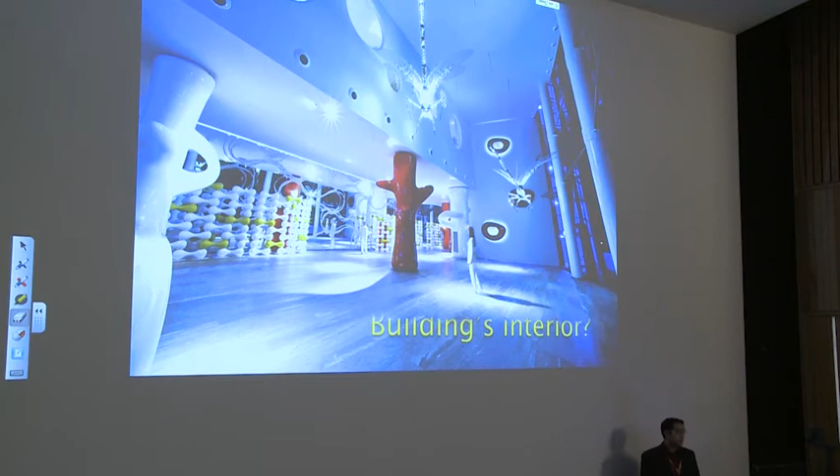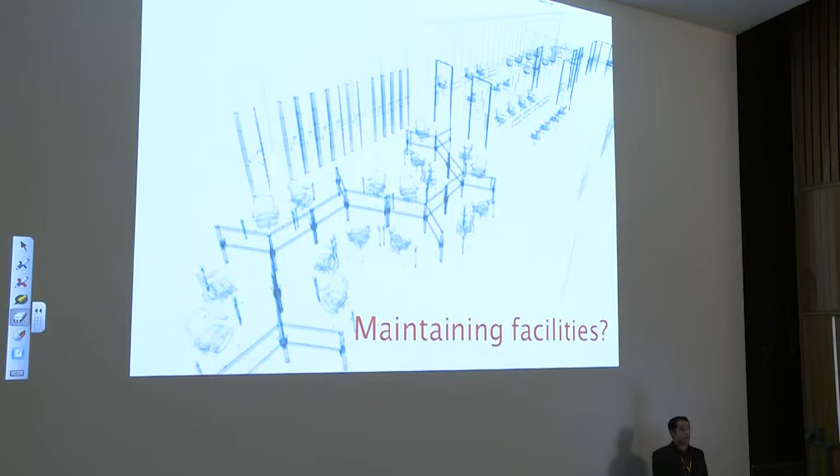Is it the building's life? Is it the building's interior? Is it the energy performance of the building, which most companies look at for the moment? Is it maintaining the facilities within the building? Or is it about occupant satisfaction in the building? To be honest with you, it's all about this.

That's why it's a concept. It's an interdisciplinary concept, and you can't really identify it.

Unfortunately, if you see the left figure on top here, it shows there is a potential for the building. This is one example of a building where the energy performance, meaning the energy consumption of that building, is potentially meant to be at grade C, which is very high, so it consumes less energy. However, once the building starts operating, it's at almost grade F.

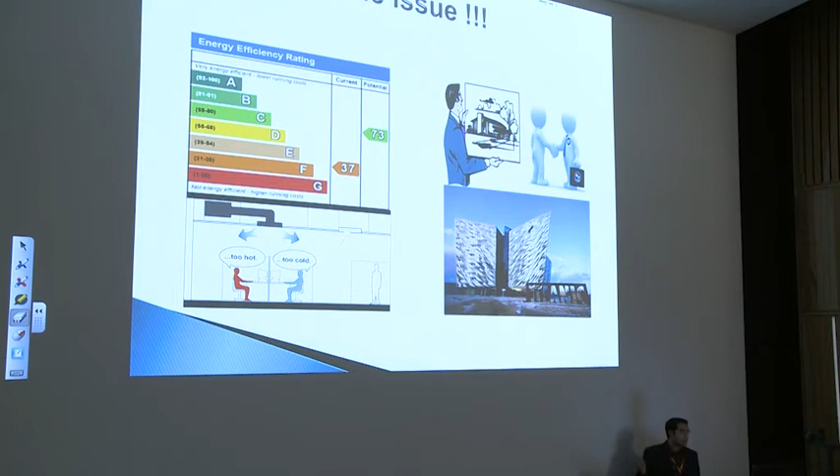Very surprising. Why? And of course us, the victims, you see people complaining about the temperature. It's too cold and too hot, even within the same area. On the other side here, one side of the problem is buildings not performing as intended, unfortunately.

The other side of the problem is performance is evaluated from a single perspective. Unfortunately, this is a very sad truth that the building management team always takes charge of the delivery of the building. The client wants the building delivered with the minimum cost, the designer wants to deliver it with higher efficiency, and the rest of the parties who play a main role in the delivery of the building, their main objective is just to deliver the building with minimum cost.

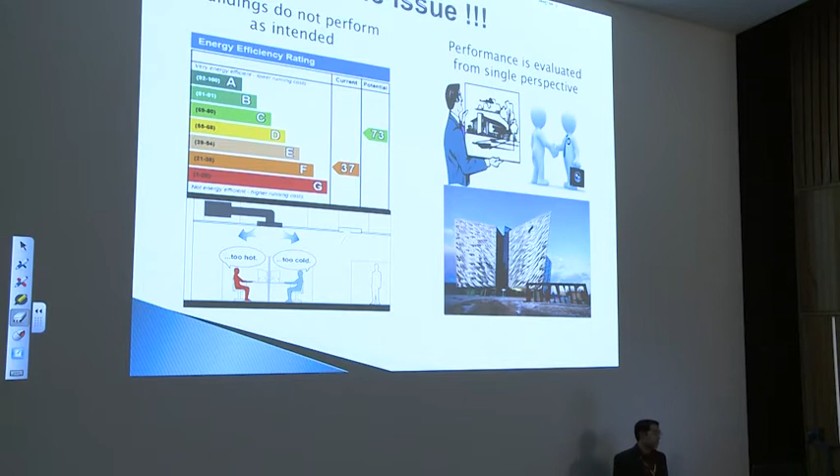So if we summarize here, buildings are more than delivering the building itself. If you see the bigger circle, it describes what the real life is, what the actual truth is. There is always a desire to deliver the building through design and construction, then operation, and then it goes with less importance to caring about the planet, environment, sustainability, then less into people, and then less the prosperity. From that point of view, I think my research focus would be on consideration of the multiple perspective.

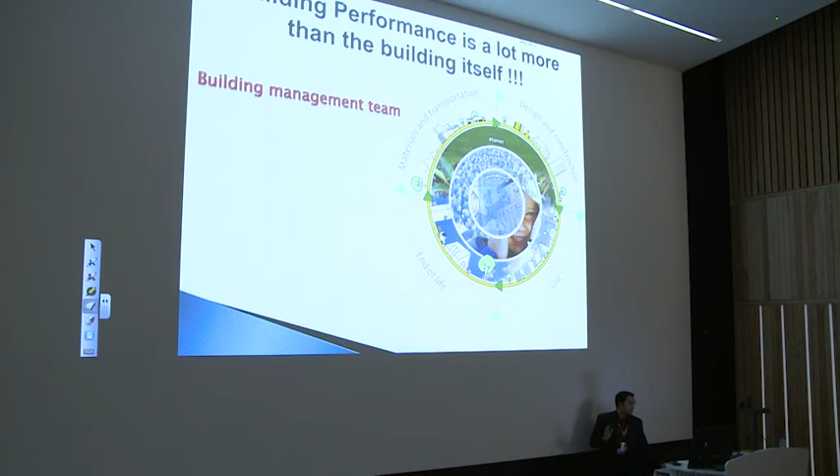If we take it from the most important to the least important: the building management team are the ones making decisions and delivering the building. Facility management are the hidden angels of the building, trying to maintain the balance between the building management team and the building occupants. The building occupants are the victims, the ones who don't have any contribution, and who either end up satisfied or totally unsatisfied within the building.

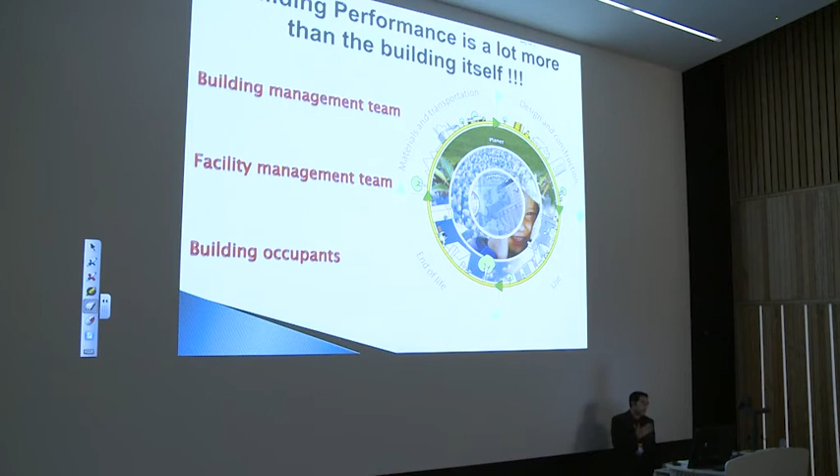So there should be a solution that can at least provide a platform which could collect all these inputs from the three different perspectives. It's building information modeling.

Building information modeling, in simple terms, is like a mutual platform where all the stakeholders within the building have their inputs: civil engineers, mechanical engineers, electrical engineers, architects, designers, clients. They all share their information within a single platform in a 3D model environment, and each one of them can get updated with any change.

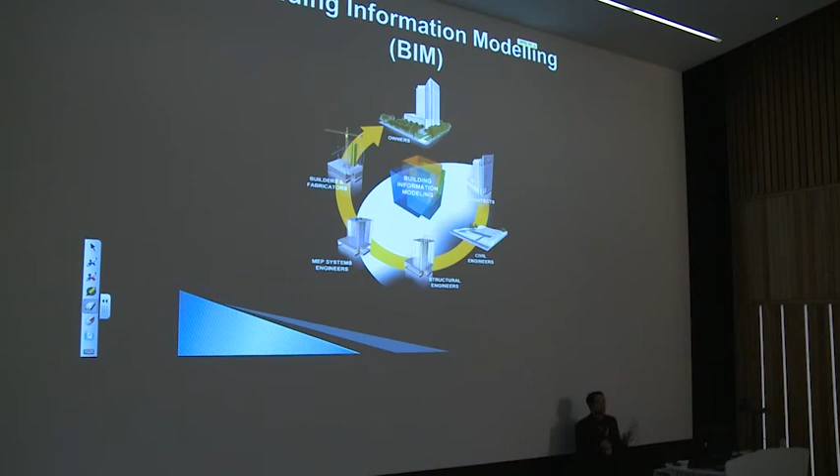With the use of this technology, we can see very high detailed 3D buildings here. But again, I'm not trying to promote the technology. At the same time, a lot of people understand BIM models as just very fancy 3D models.

In fact, it's not. BIM is a process. That's why it's called building information modeling, not 3D modeling, because 3D graphics have already been around for a long time. What building information modeling provides is the ability to have input inside the 3D model.

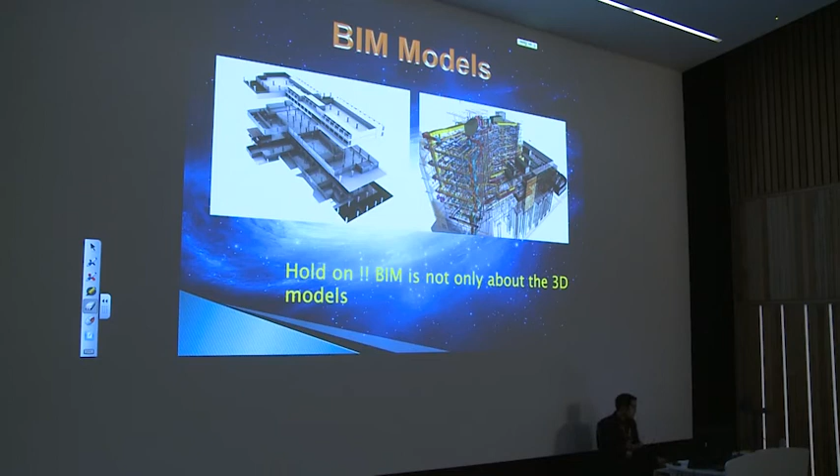So what does BIM provide? It provides coordination, allowing everyone participating within the project to coordinate and collaborate at the same time.

It detects the clashes between systems integrated within the buildings. It provides full system integration. You can't imagine the number of systems within a building, and when they're all integrated into one single model, how enormous that is, how big it is, and how difficult it was.

Some companies like Autodesk Revit are now providing a single interface for all these systems. Can you imagine? And it allows pre-building navigation. Navigations within the building are normally developed after the buildings are built, but BIM actually provides you the chance to do that at the design stage.

It provides life cycle information, going not only from design to construction, but from design, to construction, to operation, to the whole life cycle of the building. And it provides an effective facility management tool, which I will explain later.

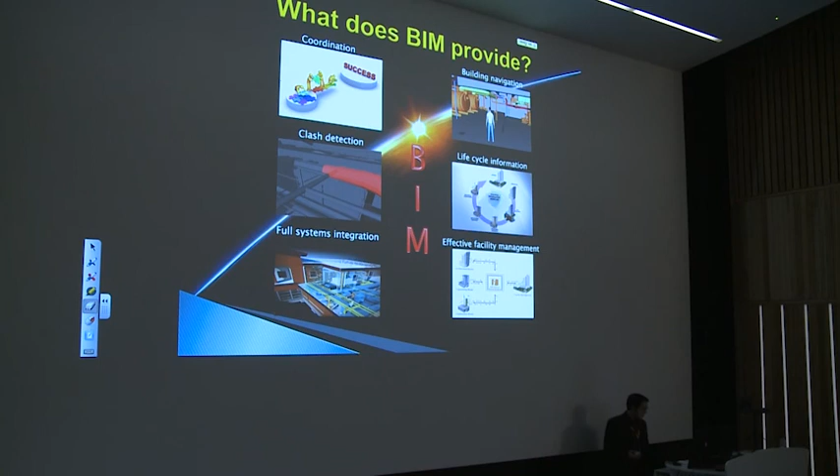It delivers sustainability. This building, the one you are in now, recently won an award as the most sustainable building in the West Midlands, and it was actually designed using BIM. All the systems within the building were simulated through BIM, and you can see there's an accurate energy performance.

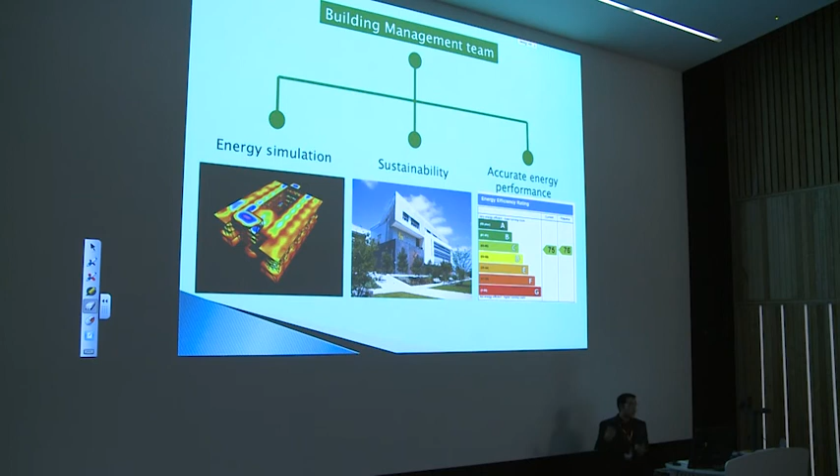It provides accurate energy performance. So even though there is a little difference, the gap is not huge.

For the facility management team, it helps them manage the operation and maintenance. So for reactive maintenance within the building, they can get information at the pre-design stage or design stage, where they know how systems are being repaired or replaced within the building. They can manage the space as well.

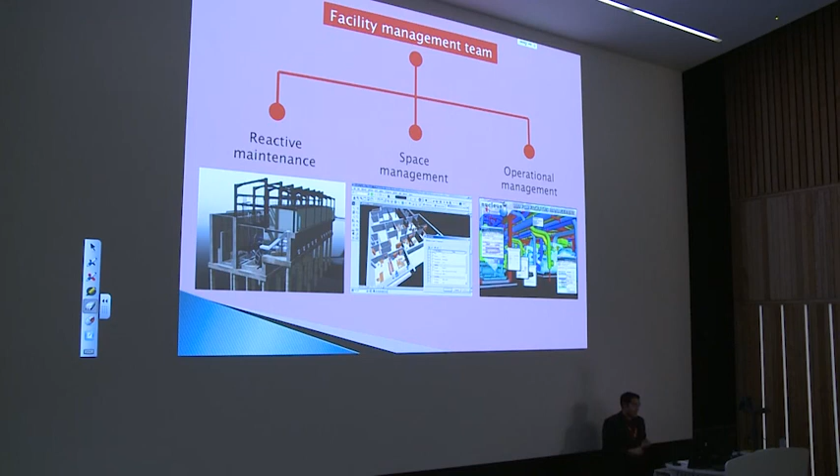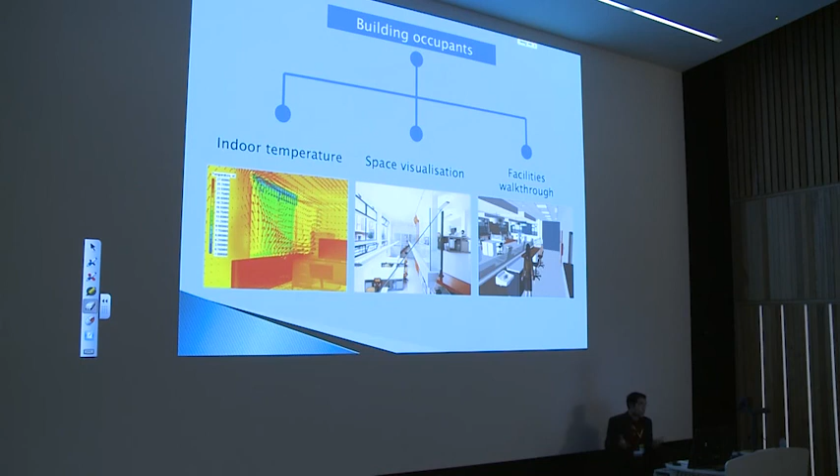You can see on the right here, this is taken from one of the models, where the information shown for each component includes its specification, manufacturer, how it's replaced, startup, emergency shutdowns, and so forth. For building occupants, it gives them a pre-simulation for the indoor temperature, space visualization, the place where they're going to work, and a facilities walkthrough to see which facilities they require.

The future of building performance, we are really going after all that. We are going beyond the shell of the building and just the delivery of the building, to the actual performance of the building from the inside, because that's where the problem lies.

We're trying to bring the post-occupancy evaluation to a pre-occupancy evaluation. We're trying to deliver an easier, smoother way for facility managers to manage the differences between what the building management team wants and what the building occupants want, while at the same time managing facilities within the building.